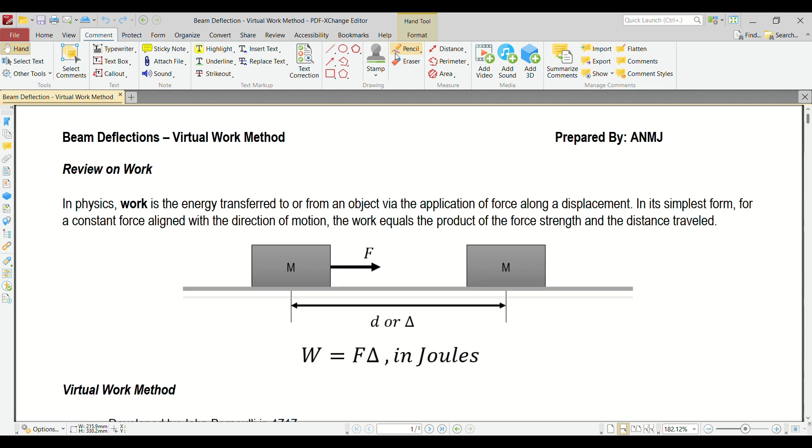So sabi dito class, in physics, work is the energy transferred to or from an object by the application of force along a displacement. In its simplest form, for a constant force aligned with the direction of motion, the work is equal to the product of the force strength and the distance it travels. So ano daw po ibig sabihin? How do we define work in terms of mathematical equation?

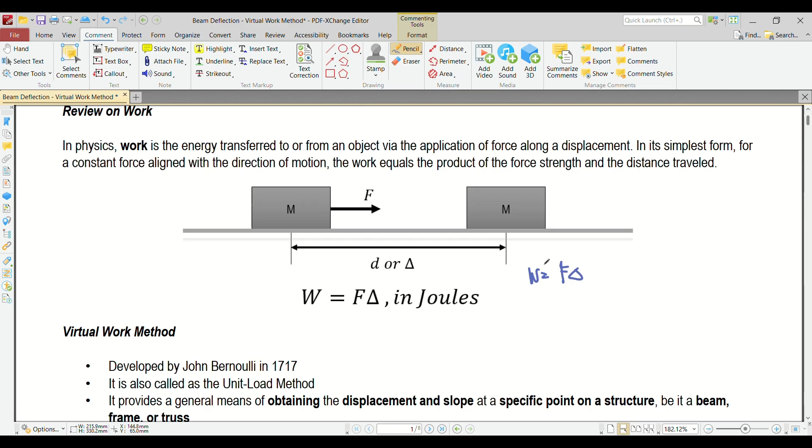So virtual work method is developed by John Bernoulli in 1717. It is also called as unit load method. By the way, class, yung virtual work method is not only applicable for beams, ginagamit din po siya sa frames and trusses. It provides a general means of obtaining the displacement and slope at a specific point on a structure, be it a beam, frame, or truss.

So kaya siya tinawag na unit load method is because you need to incorporate one unit point load or one unit moment. It depends on what you are asked to get. For example, you want to get the displacement, 1 unit load yon. Kapag slope, 1 unit moment. It revolves around the concept na dapat yung external work must be equivalent to the internal work.

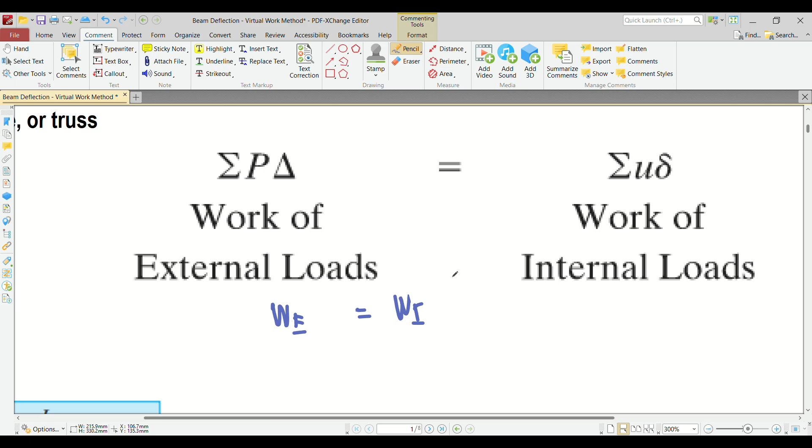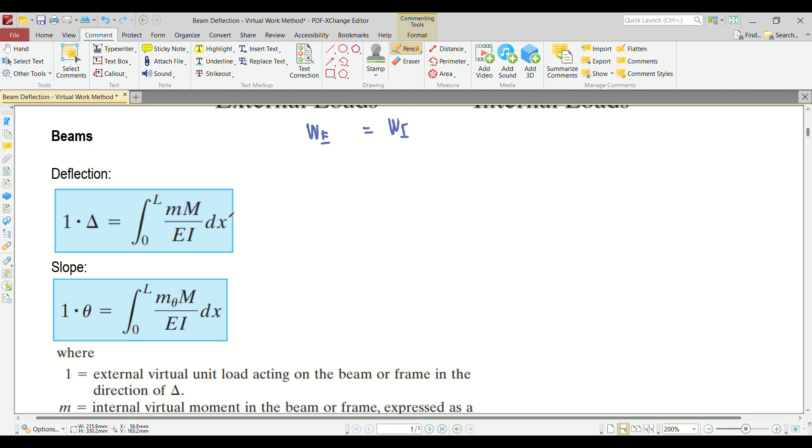So I have here the formula for the deflection and slope for virtual work method. So paano natin gagamitin tong formula na to? Before we start, let's derive this formula. To derive this formula, let's consider a beam. Kunyari may beam tayo. Sabihin natin simply supported na lang. This is a pin, and then this is a roller.

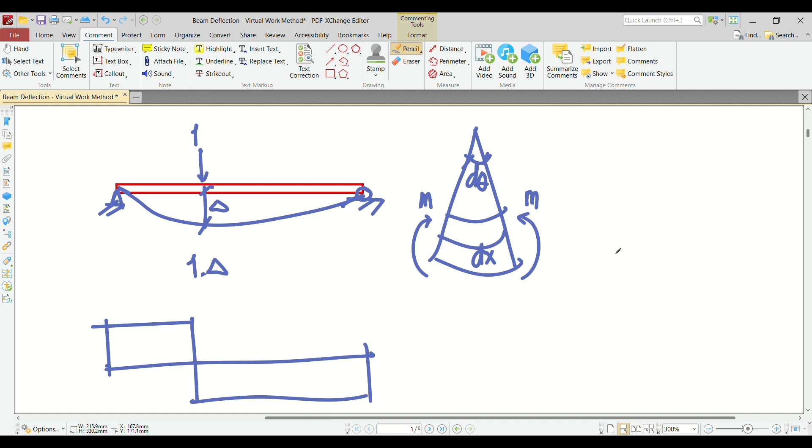So, paano yun? So, again, the external work is 1 multiplied by delta. The internal work will be M or the internal moment multiplied by d theta. Yung d theta po ay magsisilbing displacement. Yung moment po ay magsisilbing force. Remember, parang pwede natin silang i-equal. It's because d theta doesn't have any unit kasi naka-radian po siya. And then yung moment natin, alam naman natin kilonewton meter yan or newton millimeter.

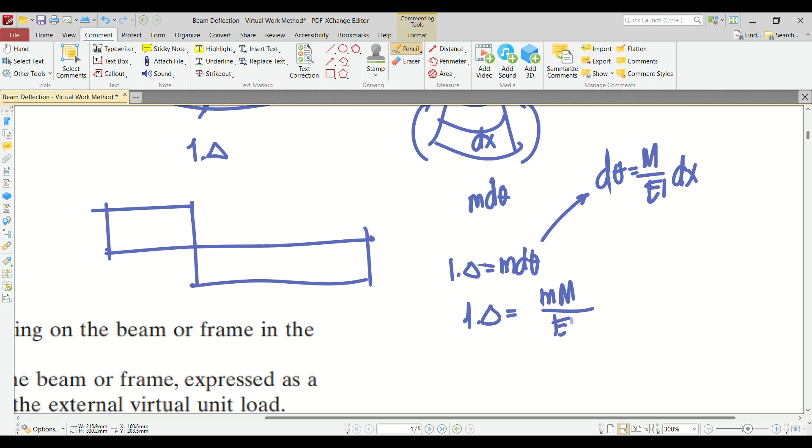Okay? So pag equate na natin yung dalawa, so ibig sabihin pala, 1 multiplied by delta is equivalent to m d theta. If you'll remember, based on our derivation, d theta is equivalent to M over EI multiplied by dx. So we can substitute that here. So magiging 1 multiplied by delta or the displacement is equivalent to small m, big M over EI multiplied by dx.

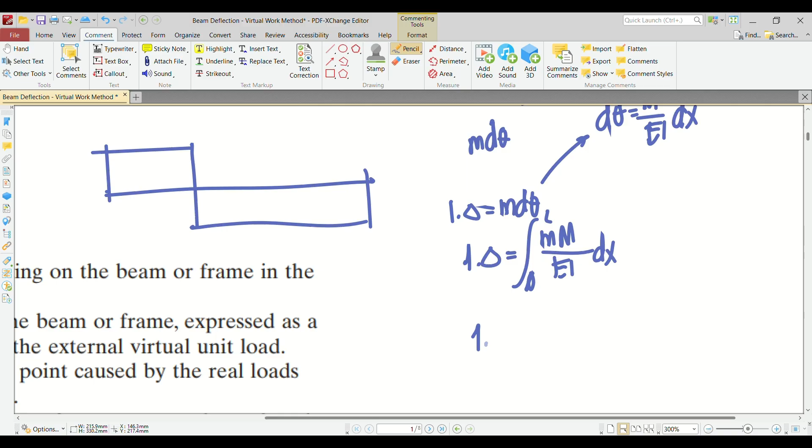Now, to get rid of the derivative, of course, you need to integrate the right side. So, kapag in-integrate natin yan, may limits, sabihin na natin from 0 to L. So, therefore, our equation will become 1 multiplied by delta. By the way, we're talking about different moment at different segments of the beam. So, kadalasan nilalagyan yan ng summation. Mamaya explain ko kung bakit lalagyan ng summation.

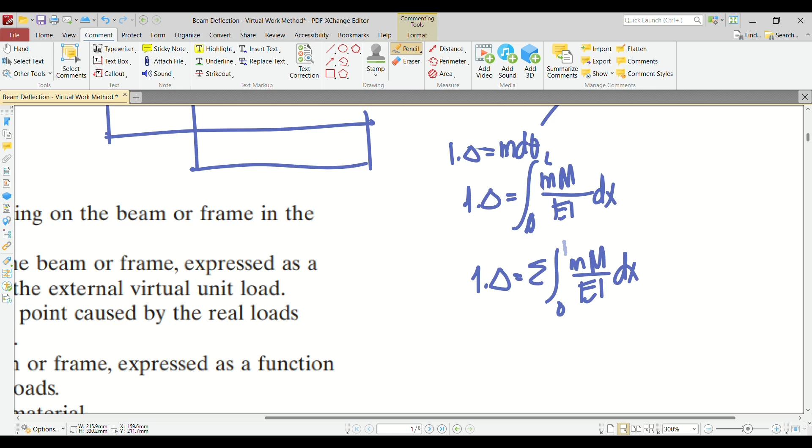So, that is the integral of small m, big M over EI multiplied by dx from 0 to L. So, yan yung nakikita nyong formula dito na na-derive. It comes from the internal work and the external work. So, like I said, we have multiple moment equations, so we need to incorporate summation here.

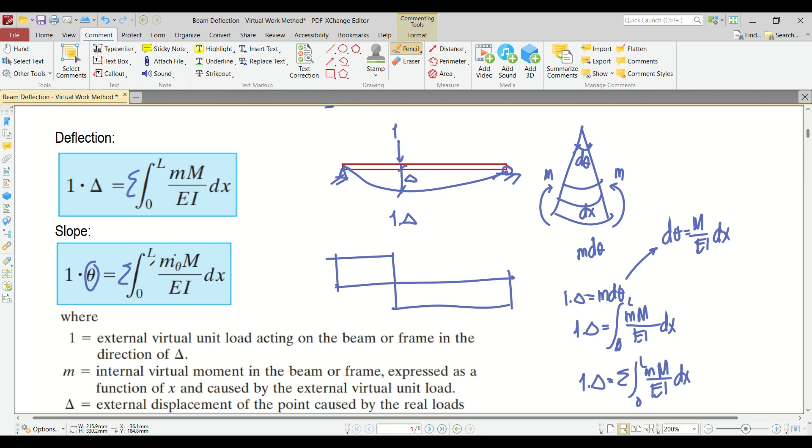So, ngayon, what's the difference between small m tsaka small m theta? Kasi pag small m theta, you don't need to incorporate 1 unit concentrated loading. Ang i-incorporate mo instead of this one is 1 unit moment. So, it depends. Mamaya, sabihin natin yung sign convention. But, if m theta ang hinahanap or slope ang hinahanap natin, instead of concentrated load, you need to apply moment. Okay? So, now, let's discuss the different variables here.

So, yung 1, class, is the external virtual unit load acting on the beam or frame in the direction of delta. Small m is the internal moment in the beam or frame expressed as a function of x and caused by external virtual unit load. So, galing daw sa unit load yung small m. And then delta is the external displacement of the point caused by real loads acting on the beam or frame. And then big M is the internal moment in the beam or frame expressed as a function of x caused by real load. So, that's the difference between the two.

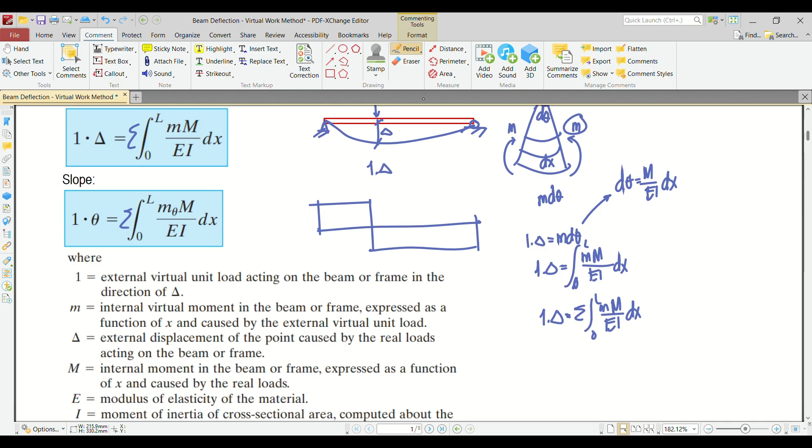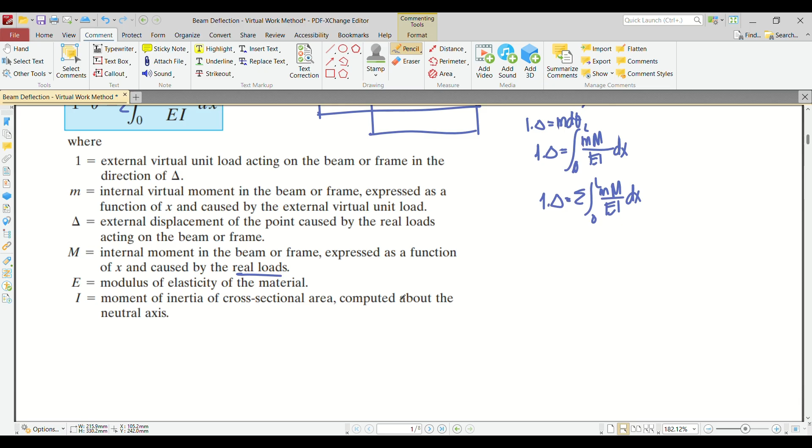Yung small m po is based on the 1 unit loading na in-apply mo. Yung big M kasi natin, class, is based on the real loads. Mamaya, meron tayong virtual beam tsaka real beam. I-explain natin yan mamaya. Pero there's no difference between the support condition unlike conjugate beam method. In virtual work method, magkakaroon ka lang ng virtual beam na nilalagyan mo ng 1 unit loading. And then E is the modulus of elasticity of the material. I is the moment of inertia computed about the neutral axis. So, that's the different variables.

So, ngayon, bakit ko sinabing kailangan siyang lagyan ng summation? Ganito po kasi yun. For example, you want to get the value for the deflection at point A. So, therefore, you need to incorporate 1 unit load at point A. And then, you need to create a moment equation in each segment. Pag meron kang kinukuha dyan, for example, it does have a loading. So, in different loading, kailangan mo makapag-create ng moment equation.

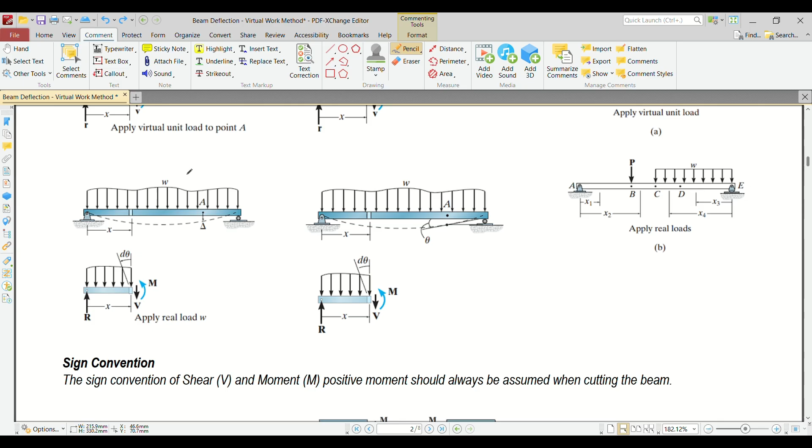And then, after you create small m based on 1 unit loading, you will create big M based on the real loading. After that, gagawin mo, ipa-plug in mo dito sa formula, and then you will get the value for the slope or deflection. Ganon din naman sa slope, no? Sa slope, you need to incorporate 1 unit moment. And then get the small m, and then big M, and then plug it in the formula, you will get the answer for the slope.

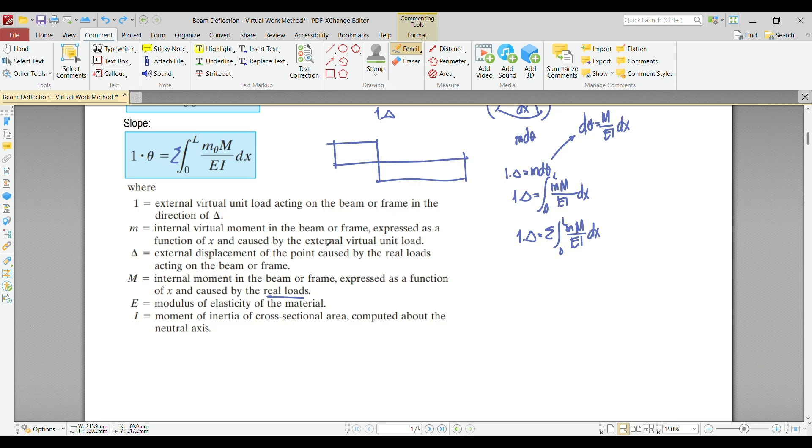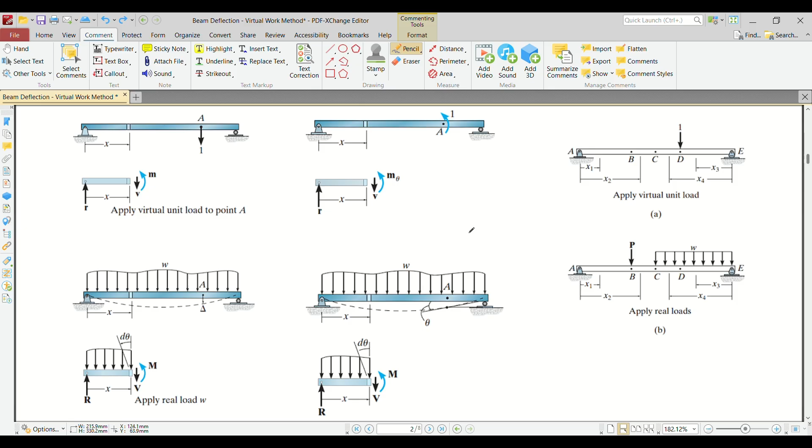Now, if you have multiple loadings, you need to break up the analysis. So, ibig sabihin, each segment of the beam, kung kailan nagpapalit ng loading, kailan nagpapalit ng cross-section, you need to create a moment equation. So if you have multiple values of x or multiple equations, of course, you need to incorporate the summation. I-add mo lang sila lahat. Okay? Basta remember, all of the segments of the beam must be scanned using integration. Kasi nga, may limit yung integration natin from 0 to L.

Okay? So ngayon, what is our sign convention? So our sign convention will be based on the sign convention presented in your figure. So ito, kabisado na natin yan. Kapag kinonsider natin yung left side, the direction of the shear is downward, direction of the moment is counterclockwise. Kapag right side naman, upward yung shear, clockwise naman yung moment. But that doesn't define the direction of the deflection as well as the slope. Ano magdi-define po? Yung assumption mo.

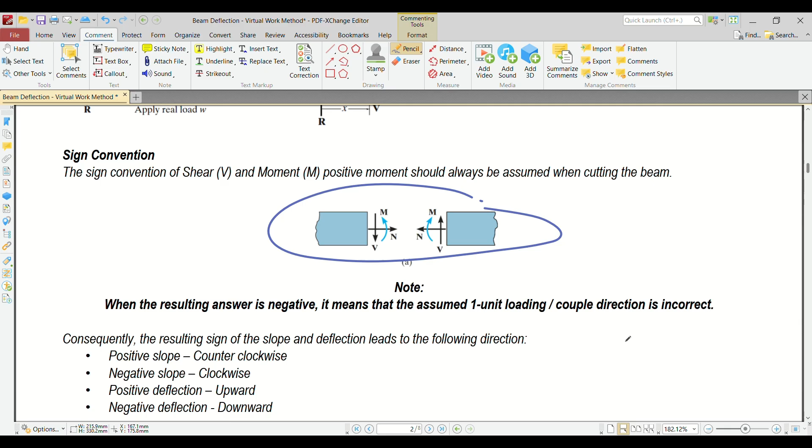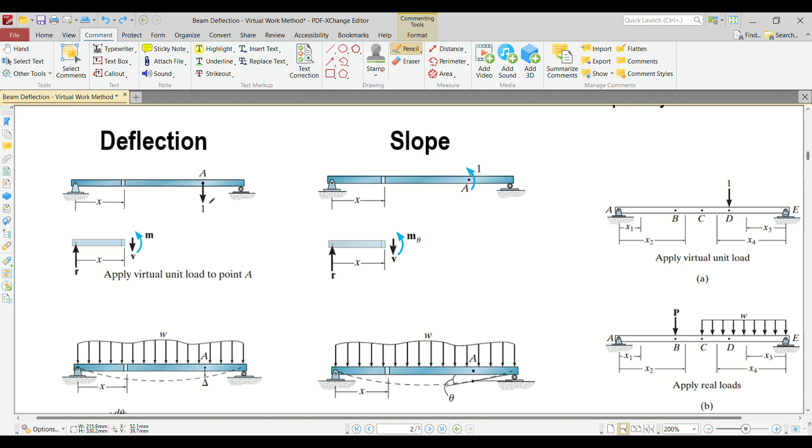So sabi dito, class, when the resulting answer is negative, it means that the assumed 1 unit loading or couple direction is incorrect. So what does that mean? For example, nag-solve tayo ng deflection, in-assume natin na pababa yung deflection. Remember, class, yung work natin is force multiplied by the displacement. Yung displacement should be along the direction of the force. So ngayon, kapag negative yung nakuha natin, ibig sabihin, hindi po along the direction of the force yung deflection. Ibig sabihin, upward yung deflection natin instead of downward, if you got an answer of negative, considering downward 1 unit load.

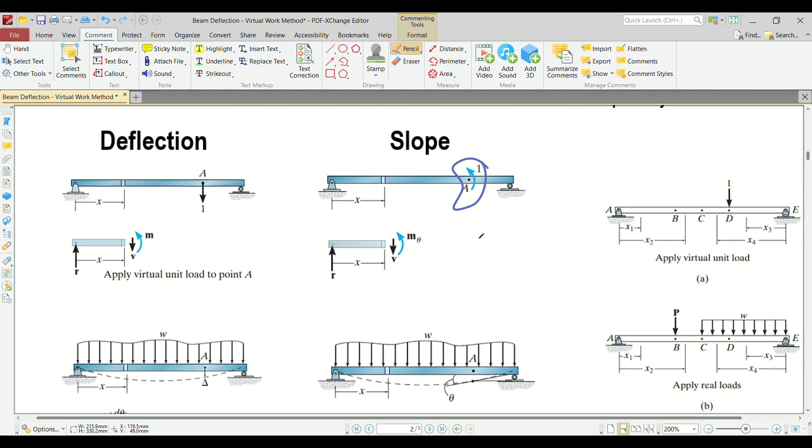Ganun din naman sa moment, no? Or sa slope. Kapag nag-incorporate ka ng counterclockwise and then the resulting answer is negative, it means that the real rotation of the beam is clockwise. No? So, doon po nagbe-base yung sign convention natin. Don't worry, we do have an example for that. So, just stay tuned.

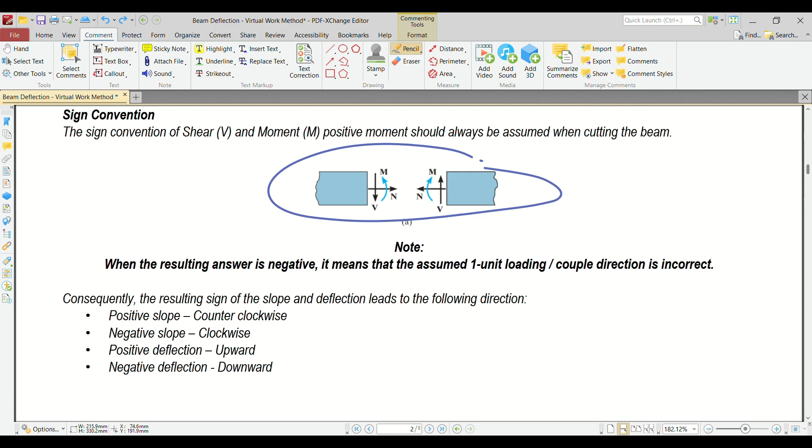So, ngayon, para hindi tayo magkalituhan for our quiz or assessment, kukopyahin na lang natin yung sign convention for the double integration method, which is positive slope, counterclockwise, negative slope, clockwise, positive deflection, upward, negative deflection, downward. Okay? So after that, based on the concept, since meron na tayong alam, let's try to solve problem number 1.

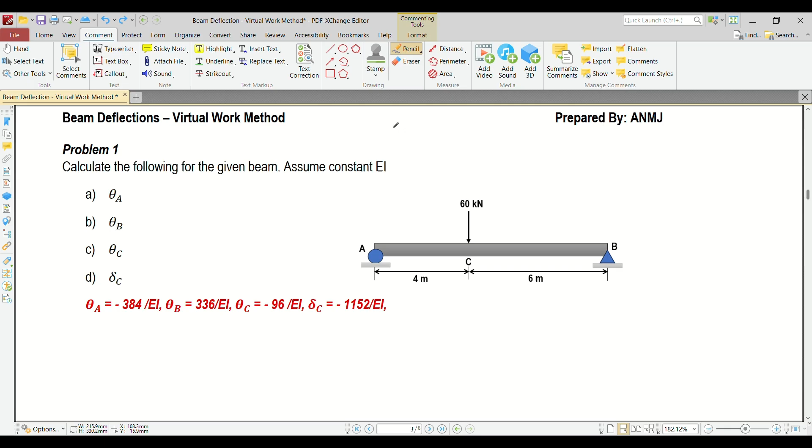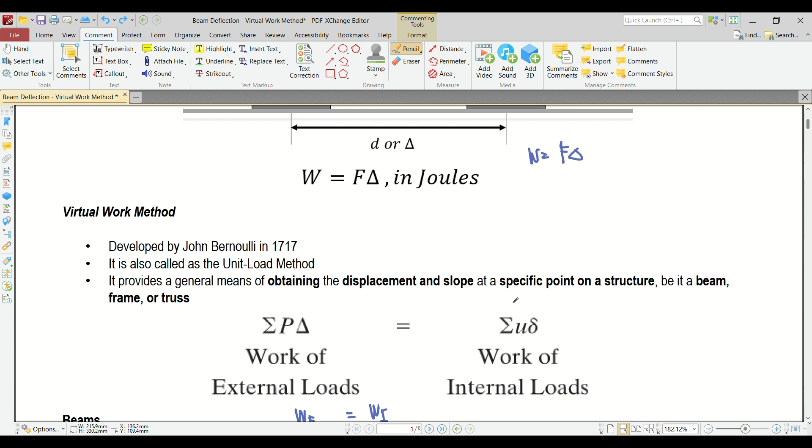Okay, so this is our problem number 1. So sabi dito, class, calculate the following for the given beam. Assume EI is constant. So we need to find the value for theta A, theta B, theta C, and deflection C. If you notice, we already solved this using double integration method, conjugate beam method, and area moment method. But doon sa mga question na yon, pinapahanap sa atin yung maximum deflection. But for this one, hindi. It's because mas maganda siyang gamitin if you have a specific point on the structure. Ibig sabihin, predefined yung point na kinukuhanan mo ng slope and deflection.

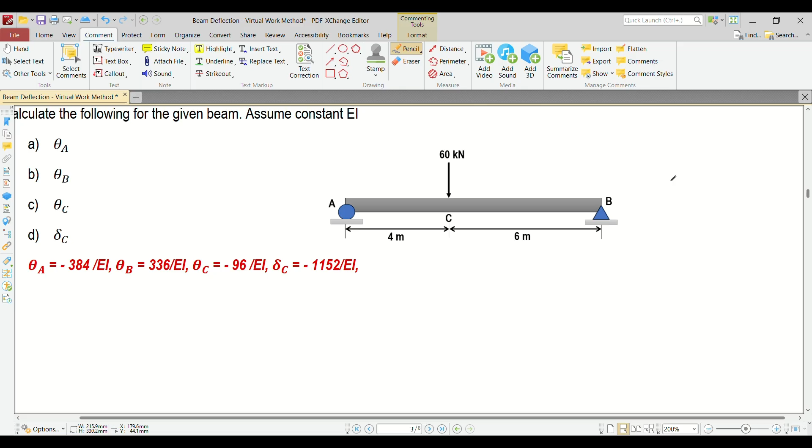And if you are going to find the value for the maximum deflection, you don't know the point. You need to calculate the point first kasi, just like what we did on our previous example, kailangan mo kuhanin kung saan ba nag-occur yung maximum deflection. From A to C ba? From C to B ba? Yung mga ganong bagay. Ngayon, you can do that here. But remember, class, pag ginamit natin yon dito, mano-manong integration tayo. And that can be time-consuming. So that's why I do not suggest using virtual work method if you're getting the value for an undefined location of deflection or slope. So mas maganda pag predefined siya, just like this one, yung mga unknowns natin dito.

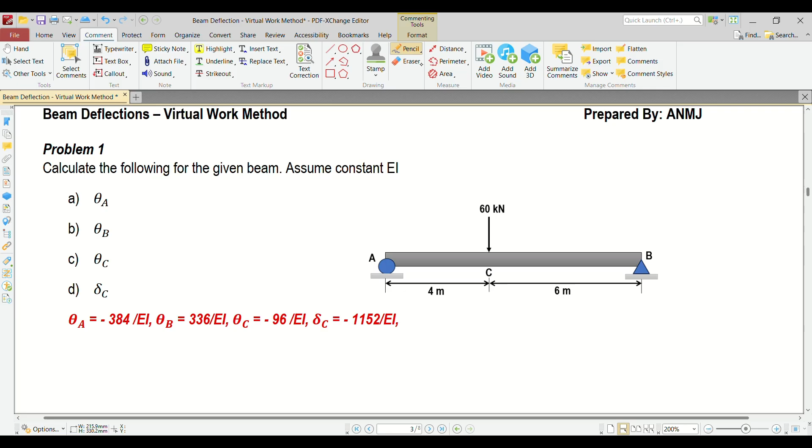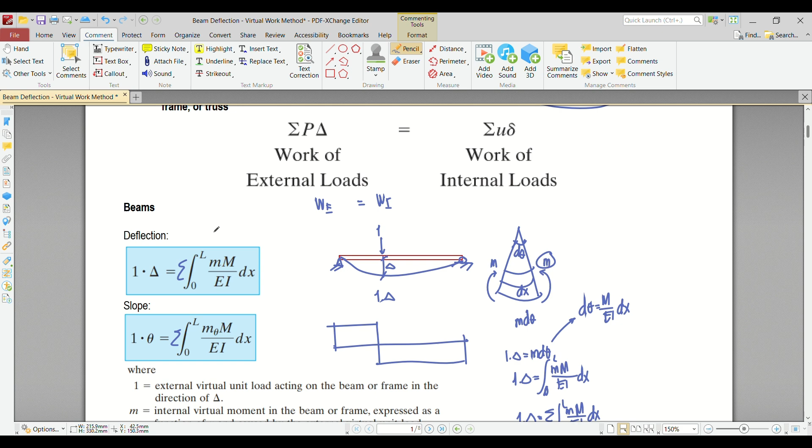Okay? So ngayon, ito yung formula, right? Balikan natin yung formula. So, M, small m, big M over EI dx, tas naka-summation. Ngayon, kailangan natin ng small m and big M. Remember, yung small m natin is based on the 1 unit load for beam.

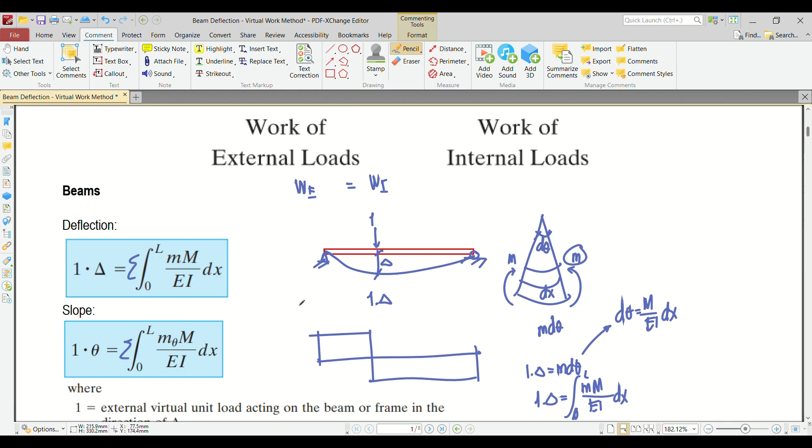And then the big M is based on the real beam. So, paano yan? Ganito po yan, class. Each segment of the beam, or all of the segments of the beam, must be scanned. And dapat may sarili kang moment equation in different parts of the beam. So, for example, we're going to solve this one.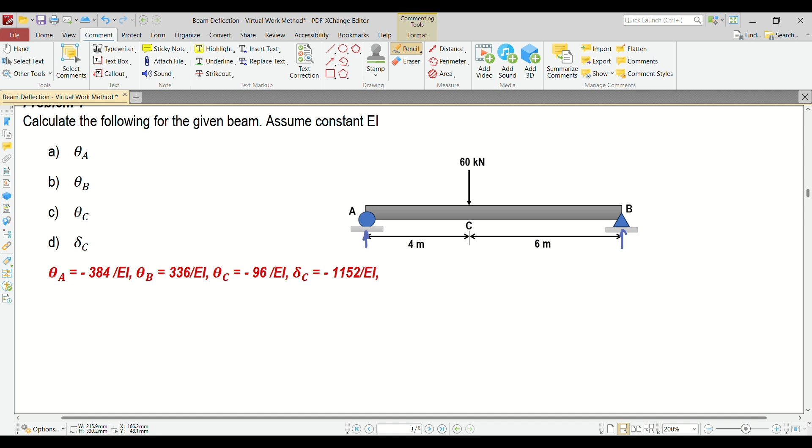So, na-solve na natin yung reaction nito, I think. The reaction for this one is 36, if I'm not mistaken. 36 kilonewton. So, this one is 24 kilonewton. Okay? So, what do we do next? We need to cut. Kasi we need to create a moment equation as a function of x. Ayan, kinat natin. So, this is x. Tawagin natin tong big M1.

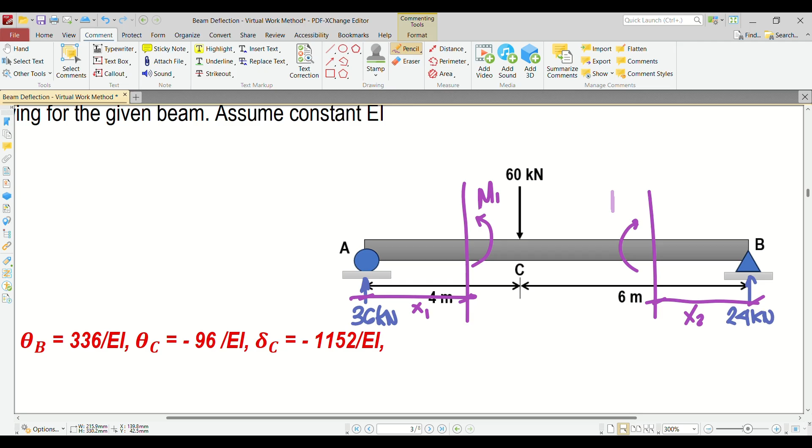Okay, this is x. Kung yan ay x, at kung ito ay M1, ito ay x sub 1. Tawagin naman natin tong x sub 2. Ito ay big M2. So now, how do we solve this problem? Una muna, create tayo moment equation M1: opposite direction, positive; same direction, negative. So, yung M1 natin, class, is equivalent to positive 36 x sub 1. Tapos yung M2 natin is equivalent to 24 x sub 2.

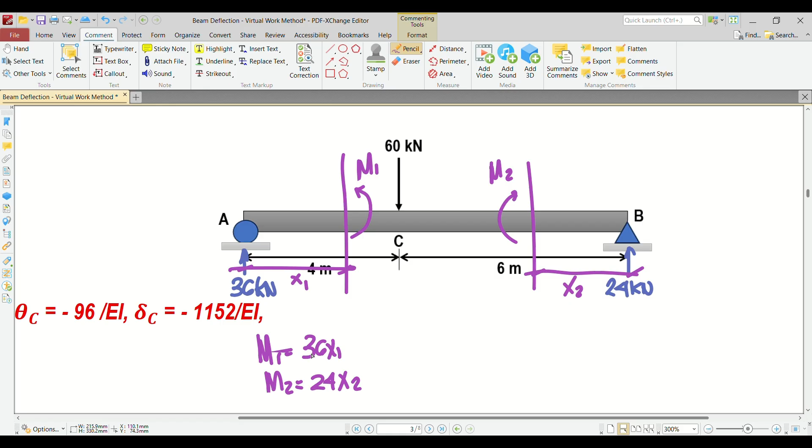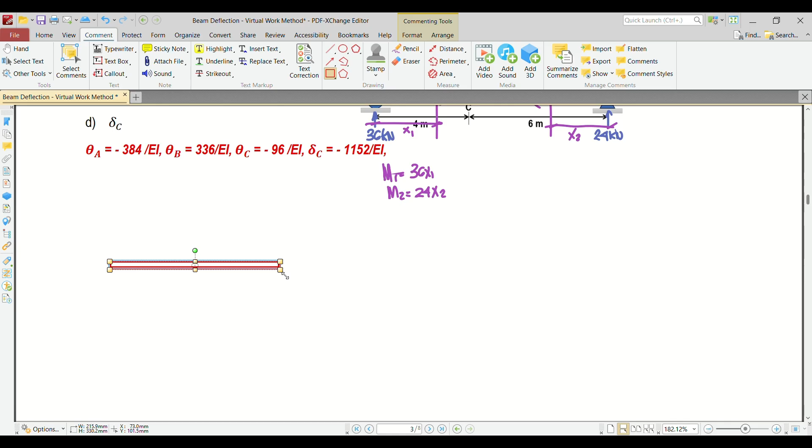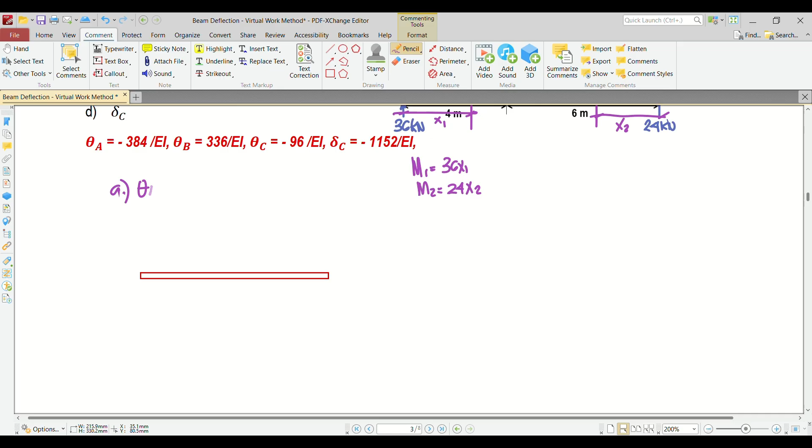So, now what's the next step? You need to create a virtual beam. Syempre, hinahanap natin ay theta or slope. We need to create a virtual beam with a 1 unit couple applied on point A. So, gawa tayo. Sabihin natin, ito ay for letter A. For letter A, ang hinahanap is theta A. Hindi katulad ng conjugate beam, same pa rin yung support condition natin dito.

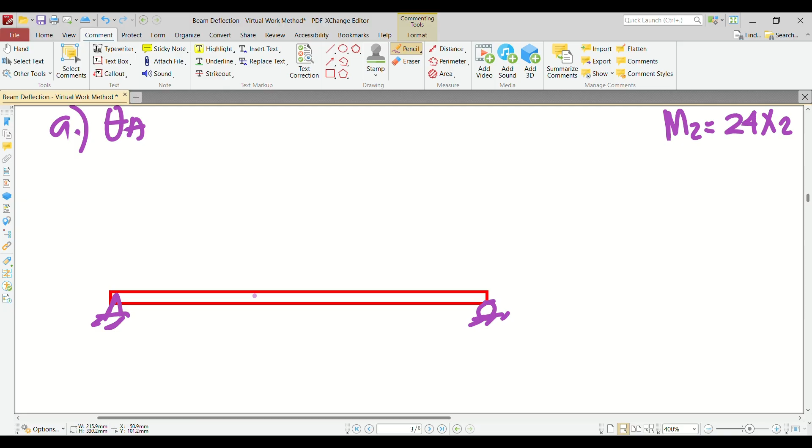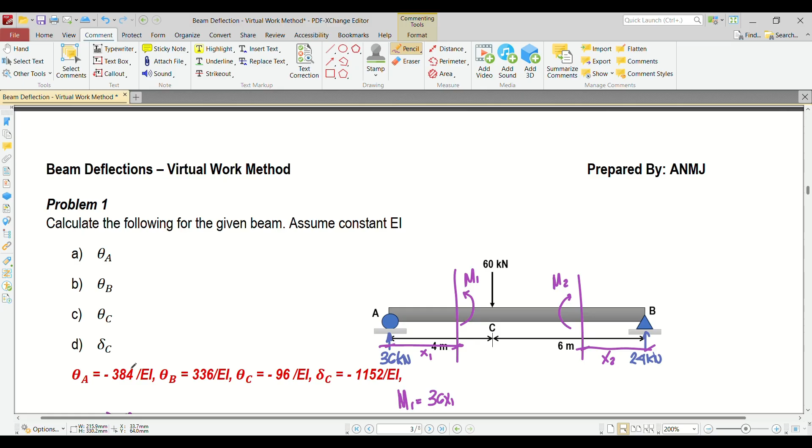So, this is letter C. This is A prime, C prime, and B prime. We need to find the value for the slope at point A. Alam na natin based on double integration method and other methods that the slope at point A is a clockwise motion. So, lagyan natin clockwise 1 unit loading. Yung unit niyan, class, is kilonewton meter. Mamaya explain natin, pero sa ngayon hindi ko muna isusulat para hindi magulo. So, 1 unit couple yan.

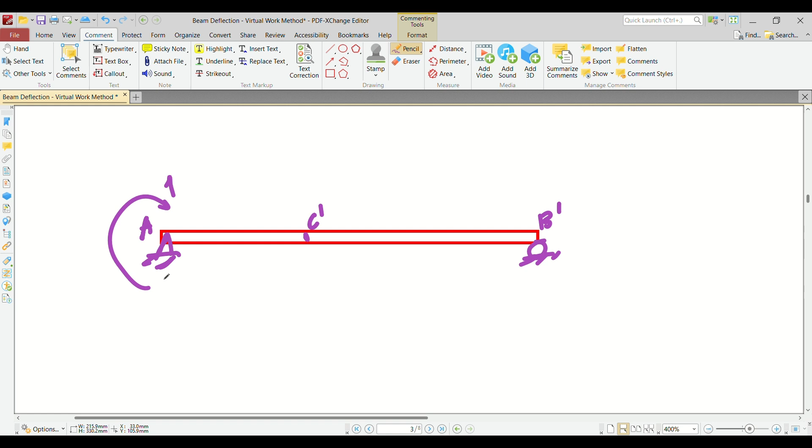So, ngayon, what's next here? We need to create a moment equation just like what we did on the real beam. E di cut mo. Kung paano mo kinat yung real beam mo, ganun mo din dapat i-cut yung virtual beam. Lagyan natin ng prime to designate the virtual beam. So, ito, class, is x sub 1 din. Pinagkaiba nito, ito ay small m1. Ito naman, x sub 2, small m2. So, we need to find the value of m1 and m2.

Remember, before we could get the value for this one, we need to find first the value for the reaction. Ngayon, yung movement ng beam natin, class, pa clockwise. So, dapat yung reaction natin, ang movement, pa counterclockwise, in a form of a couple. Ano ba yung couple? Opposite in direction, same in magnitude. So therefore, this should be downward, and this should be upward, para mag-move siya ng paganon, para ma-counteract niya to maintain equilibrium.

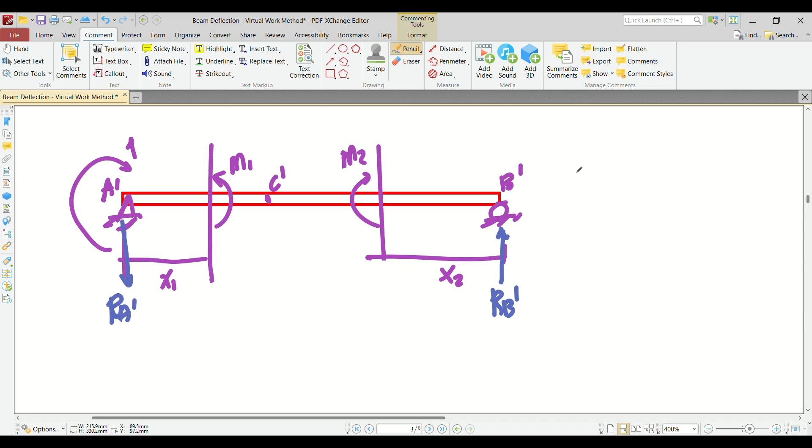But how do we determine the value of RA prime and RB prime? Actually, madali lang yan. We already solved that using conjugate beam method. Yung moment, i-divide mo lang ng distance between the supports. So, RA prime is equivalent to RB prime is equivalent to yung moment natin divided by the distance between the supports. By the way, this is 4 meters, and this is 6 meters, so this is 10. So, RA prime and RB prime is equivalent to 0.1. Ito pala ay 0.1, ito pala ay 0.1.

So, now what's next? We need to create moment equation. Yung m1 natin: opposite direction, positive; same direction, negative. Opposite si 1, so lagyan natin 1 minus, same to, so 0.1 x sub 1. Yung m2 naman, opposite yung direction, so that is 0.1 x sub 2. After that, we can now plug that in our formula. Ano ba yung formula natin?

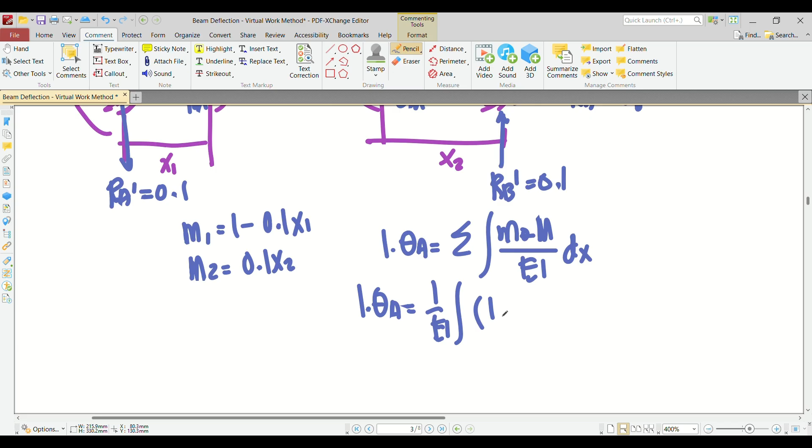Ang sabi natin, 1 multiplied by theta A is equivalent to the summation of the integral of small m theta times big M over EI multiplied by dx. So, 1 theta A is equivalent to 1 over EI multiplied by small m theta. Yung m1 muna, 1 minus 0.1 x sub 1, times big M, that is 36 x sub 1.

dx1 from, remember, all of the segment of the beam must be scanned. So, yung unang scan natin from 0 to 4, yung pangalawang scan natin from 0 to 6. Na-scan na natin yung 10. Okay? So, therefore, this is from 0 to 4. And then, plus 1 over EI ulit, multiplied by integral, small m2, that is 0.1 x sub 2, multiplied by 24 x sub 2, dx2, yung m2 natin, no? Big m2 natin dito. And then, again, yung limit natin is from 0 to 6. Ito. From 0 to 6. Okay?

So now, what's the value of theta A? So, calculate ko muna. Calculator nyo na lang yan. 384 over EI. So therefore, this is 384 over EI. So positive sign means that the direction of the 1 unit couple that we incorporated is correct. So ngayon, kung lalagyan mo ng direction yan, ibig sabihin, ganito rin yung direction yan. Kasi force times distance, yung distance is along the direction of the force. So ganito rin yung ikot niyan, yung rotation sa slope sa point A.

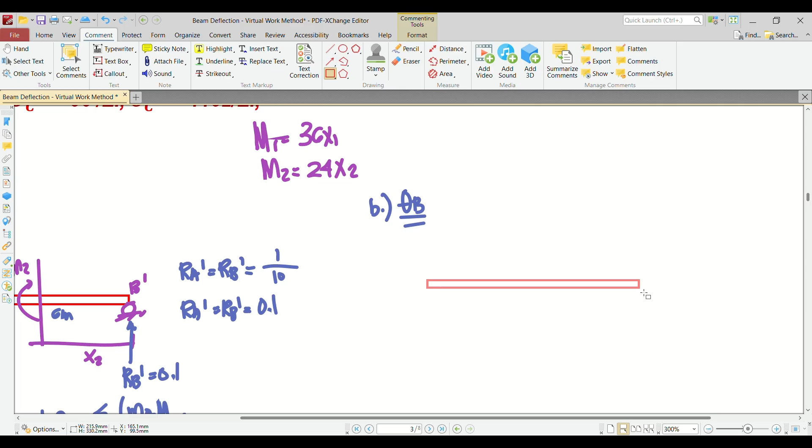So 384 over EI. So now, let's try to answer theta B. O dito na lang sa tabi. Para madali. Okay, theta B. So gawa ulit tayong virtual beam. So this is a pin. And then, roller. AC. A prime, C prime, and then B prime. So sabi, we need to find the value of theta B. So alam natin na yung rotation ng slope sa point B is counterclockwise. So yun na lang ilagay natin. Counterclockwise. That is based on double integral and other methods in getting the value for the slope. Ganyan yung direction niya, no? Okay? So now, what's next?

So again, 4 meters. Ito 6 meters. Again, you need to find the value for the reaction. Ang movement ng beam natin is counterclockwise. So dapat yung reaction natin mag-form ng clockwise direction to counteract this movement to maintain equilibrium. So paano siya magko-provide ng ganito? So in the form of couple, no? So ito dapat pababa, ito dapat pataas. Okay? So this is RA prime, and then this one is RB prime. And then again, in order to solve that one, yung moment, i-divide mo lang sa distance between the supports. So therefore, this is 1 over 10. So yung RA prime natin, RB prime, is equivalent to 0.1. So ngayon, 0.1 pala ito, and then 0.1 din pala ito.

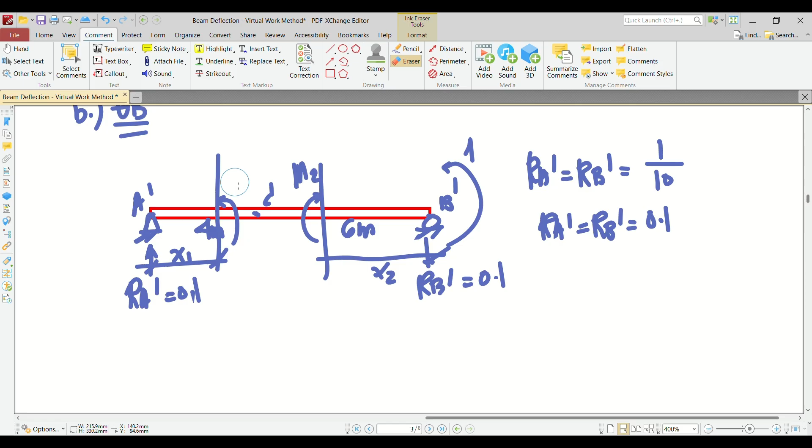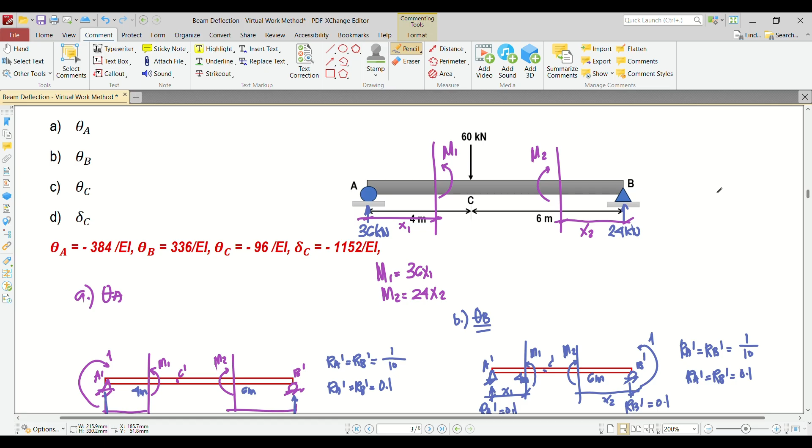So again, just like what we did, kung paano mo kinat yung real beam mo, ganun mo din ikakat yung virtual beam. By the way, yung equation natin kanina, wait lang ha, ayusin ko lang ito. Small m2, small m1. Yung equation natin kanina, yung 36x tsaka 24x, hindi naman magbabago yan kasi that is based on the real beam. Hindi naman nagbabago-bago yung loading ng real beam. Ang nagbago-bago is yung position ng 1 unit load mo tsaka yung kung moment ba siya or force. Okay? So ngayon, let's create m1 and m2. Opposite direction, positive, same direction, negative. Yung m1 natin, opposite direction. So that's 0.1 x sub 1. Yung small m2 natin is 1, opposite direction, minus same direction. So 0.1 x sub 2. So i-plug in na natin yan sa ating formula.

So 1 multiplied by theta B is equivalent to 1 over EI multiplied by the integral of small m1, that is 0.1 x sub 1. If you'll remember, yung big M1 natin, 36 x sub 1, dx1, from 0 to 4. So, plus 1 over EI, multiplied by the integral, small m2, 1 minus 0.1 x sub 2, times 24 x sub 2, dx2, from 0 to 6. Okay? So, what's the value for theta B? So 0.1x, 36x, 0 to 4, plus integral of 0 to 6. So this is 336 positive, no? Over EI. So therefore, this is your answer.

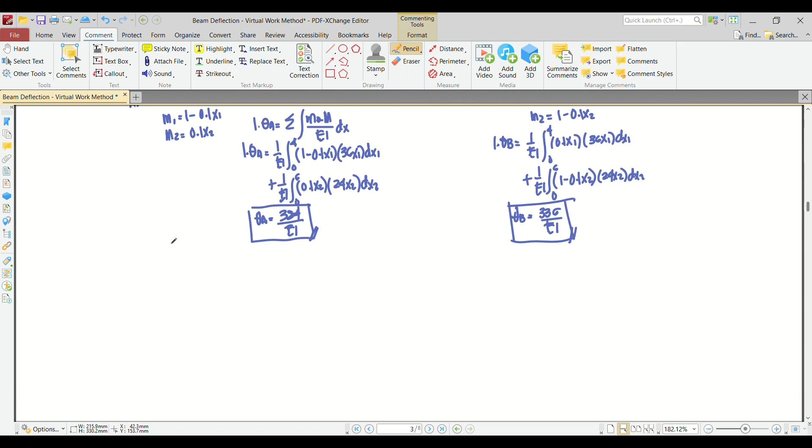Ngayon, anong direction neto? So, yung direction neto, class, is kung ano yung inilagay mo dito, which is counterclockwise. Okay? So, that is our answer, letter B. O, answer naman natin yung letter C. Sa letter C, class, ang sabi, we need to get the value of theta C. So, ito, theta C. O, gawa ulit tayong virtual beam.

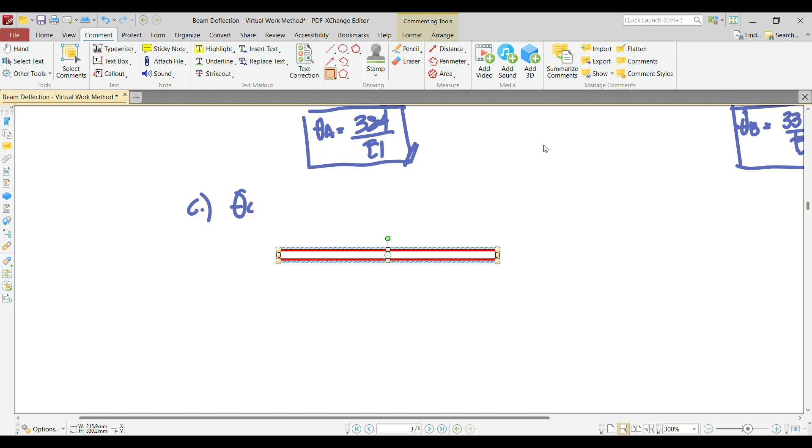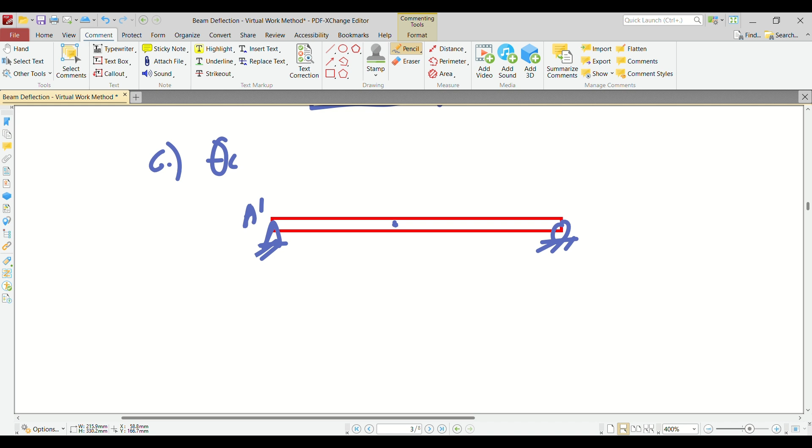Again, yung virtual beam natin, pin pa rin ito, to roller. This is A prime, C prime, and then B prime. This is 4 meters, this is 6 meters. So, i-assume natin na yung rotation sa C prime is counterclockwise. So, this is 1. Since counterclockwise yan, kailangan natin ng clockwise movement. So, ito pataas, ito pababa. This is RA prime, this is RB prime.

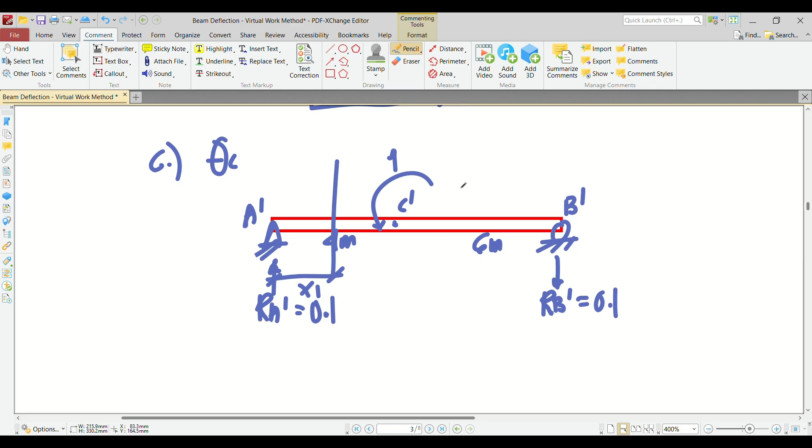And just like what we did on our previous calculation, yung 1 dito, i-divide mo lang dun sa span, or yung distance between the support para mas accurate. So, in our case, the distance between the support is 10. So, 1 over 10, this is 0.1. This is also 0.1. Again, cut mo kung paano mo kinat yung real beam mo. So, this one is x sub 1. This one is x sub 2. Direction of the moment, this is small m1 counterclockwise. Ito, clockwise, small m2. So, let's create moment equation.

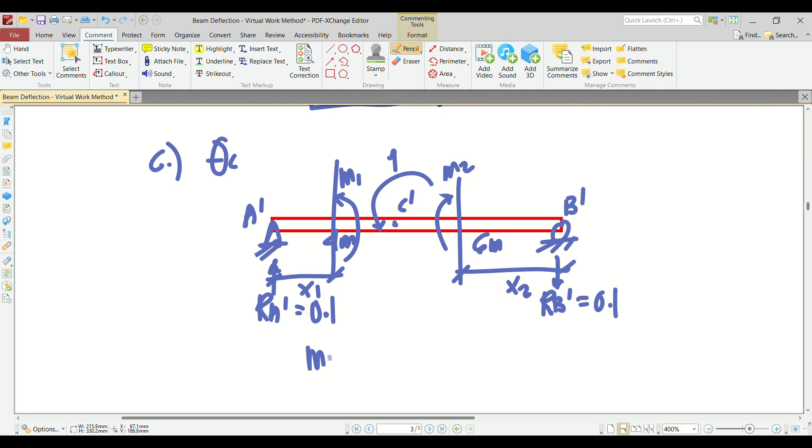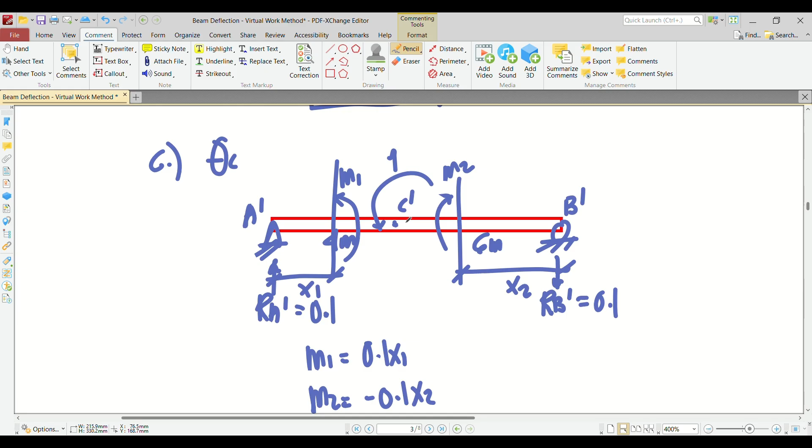So, small m1 is equivalent to 0.1 x sub 1 na positive kasi opposite yung direction. And then, yung small m2 natin, class, is same direction. So, negative 0.1 x sub 2. Okay? Ayan o, same direction sila. Ito, you don't need to incorporate this kasi hindi naman nasama sa cutting plane natin. So, now, let's plug in that in our formula.

So, 1 multiplied by theta C is equivalent to 1 over EI multiplied by the integral of small m1, so 0.1 x sub 1, times 36 x sub 1 dx1 from 0 to 4, and then plus 1 over EI multiplied by the integral of negative 0.1 x sub 2 multiplied by 24 x sub 2 dx2 from 0 to 6. So, i-plug in natin yan sa calculator natin. Anong value kaya ni theta C? So, this is 0.1 x sub 1, 36 x, 0 to 4, plus, 0 to 6.

So, ang lumalabas na value sa akin ni theta C is negative 96 over EI. So, anong ibig sabihin ng negative sign, class? Ibig sabihin, the rotation of point C is not in counterclockwise motion. Ibig sabihin, ang sagot talaga is 96 over EI in clockwise rotation. Kaya siya naging negative kasi mali yung direction na in-assume mo nung nag-incorporate ka ng 1 unit moment. So, that is the answer for letter C.

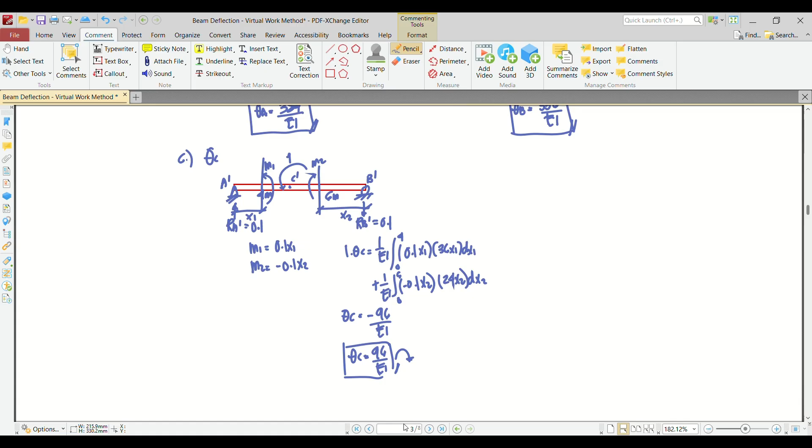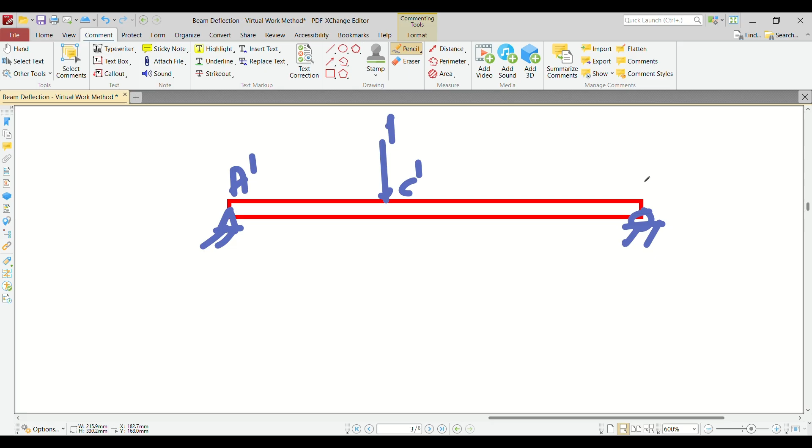So, for letter D, pinapahanap yung deflection sa point C, just like what we did on the slope. Ang kinaibahan lang, instead of putting 1 unit moment, you need to put 1 unit concentrated load. So, this is a pin, and then this is a roller. Lagay ka dito, 1 unit loading. Again, this is C prime, A prime, B prime. 4 meters, and then 6 meters. And then again, you need to compute for the reaction. Madali naman yan, basic na lang. Concentrated load na 1. So, this is 6 over 10, 0.6. Sa kabila, 0.4. This is RB prime.

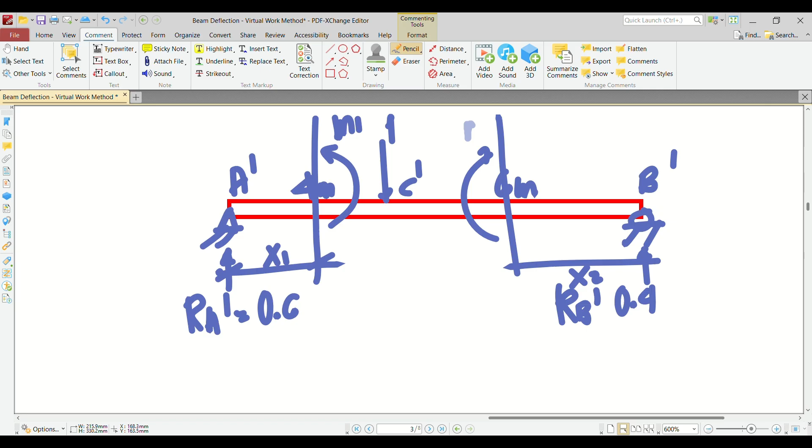Okay? So, cut mo. Create moment equation. So, this is x sub 1. This is small m1. Cut. X sub 2, small m2. So, small m1 is equivalent to opposite direction positive, same direction negative. So, opposite, 0.6 x sub 1. Sa m2, opposite din. So, 0.4 x sub 2. Tapos, integral mo. I-plug in mo sa formula.

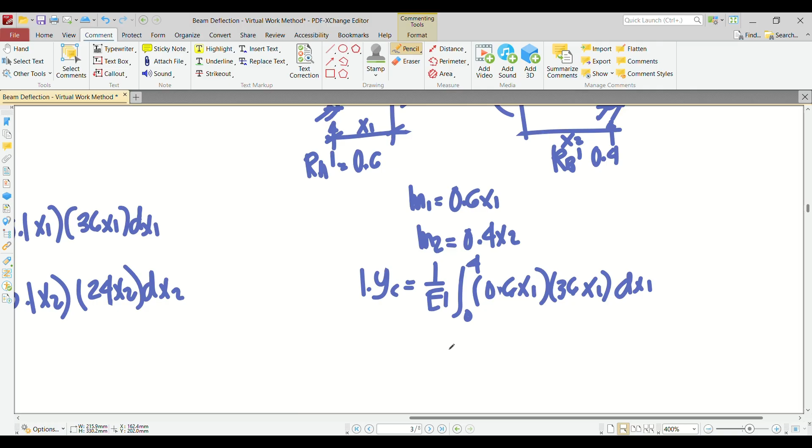So, that is 1 multiplied by delta C, or yC na lang lagay ko, is equivalent to 1 over EI multiplied by the integral of small m1, 0.6 x sub 1, times 36 x sub 1, dx1 from 0 to 4. And then plus 1 over EI multiplied by the integral of 0.4 x sub 2 multiplied by 24 x sub 2 dx2 from 0 to 6. Calculate lang natin. So, 0.6x times 36x, 0 to 4, plus integral 24x, 0 to 6.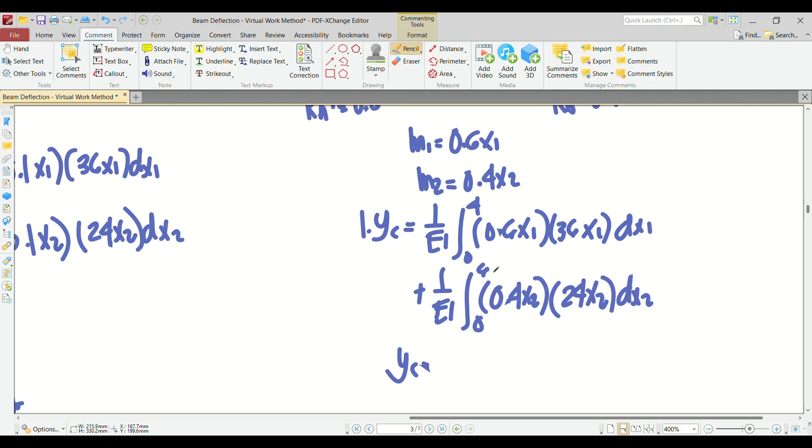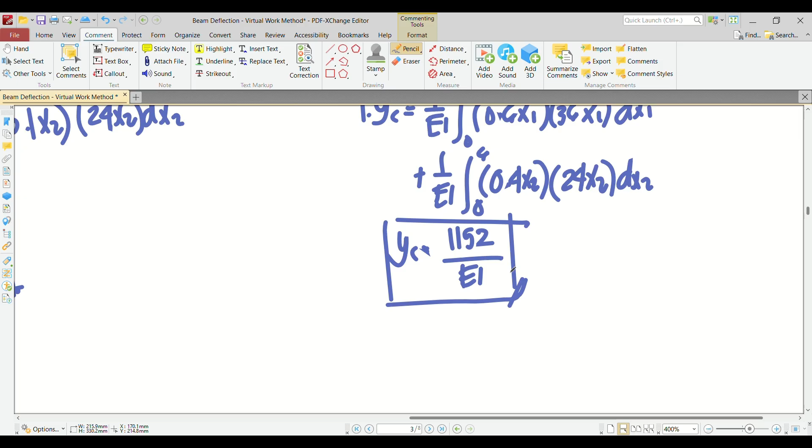So, ang nakuha ko is 1152 over EI. The positive sign means that the deflection is downward. So, tama yung assumption natin na downward yung 1 unit load kasi positive yung lumabas, or downward din yung deflection. Okay? So, that's how we answer problem number